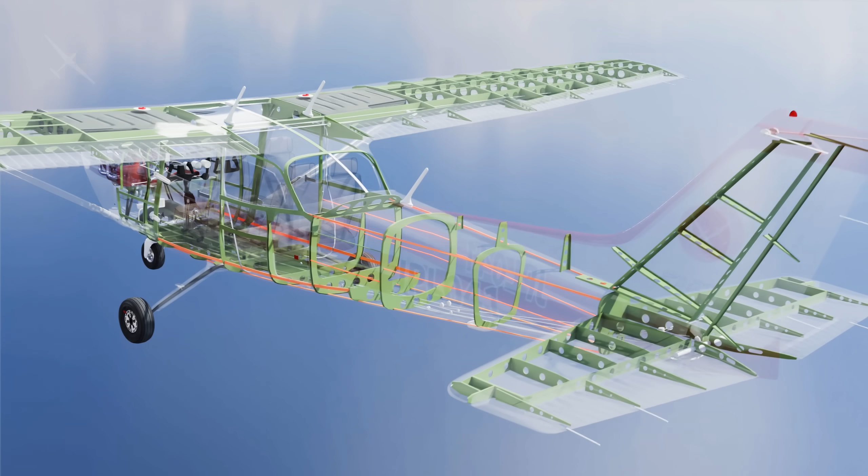The main landing gear requires to be made out of flexible steel to withstand the forces during hard landings.

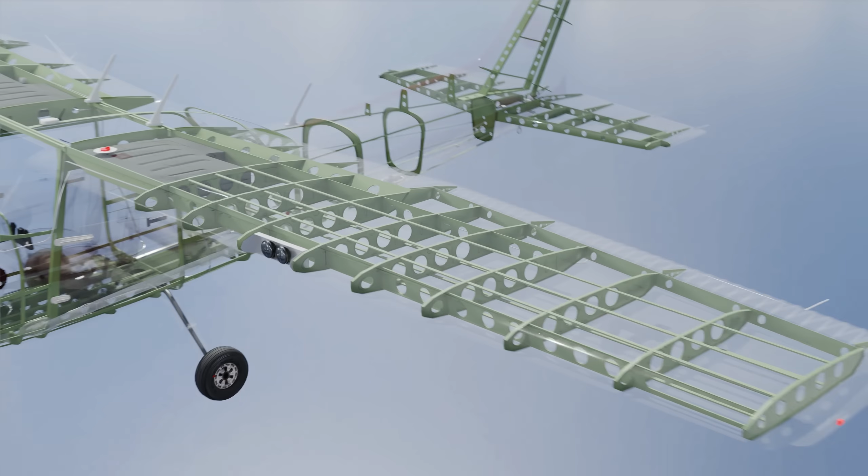If we look inside the wings, we'll find ribs, which provide the airfoil shape of the wing. Spars running through the entire length of the wings accomplish great strength, and stringers support the shape of the wing even more. The key point here is that the shape of the airfoil is very specific to preserve the flight characteristics of the aircraft and to produce lift efficiently and with the least aerodynamic drag possible.

The entire structure is covered with aluminum sheets riveted to the skeleton. This outer skin will further increase the strength of the airframe. This is called the airframe, which is considered to be the entire structure minus the engine and avionics.

The green color of the skeleton structure, sometimes yellow, comes from a primer layer of zinc chromate or zinc phosphate. It is applied to prevent corrosion on the aluminum surfaces in most parts. Older models might not have this layer of primer and will have the original aluminum metallic look.

This particular aircraft has wing struts to reinforce the joint between the wings and the fuselage. It attaches from the main spar to the lower front section of the fuselage.

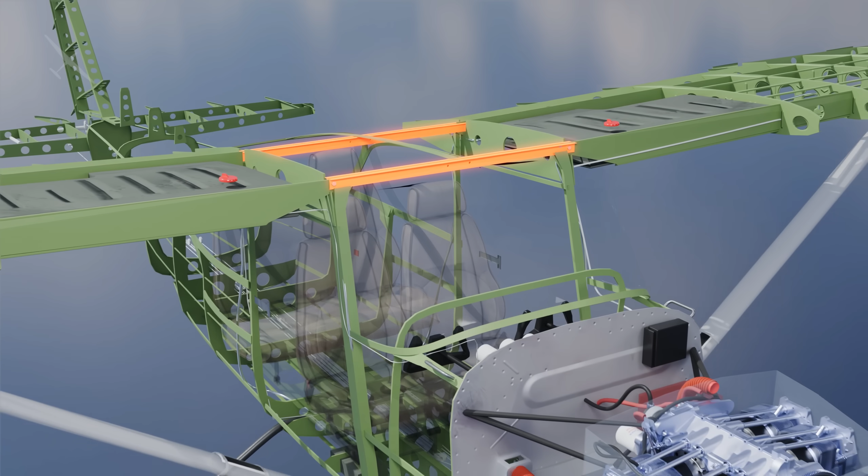Because this aircraft has a high wing configuration and headroom space in the cockpit is limited, the full main spars cannot go through the cockpit, and instead there are a couple of spar carry-through channels that join the two wings together. Of course, these channels are not as strong as the main spars, but that's when the wing struts come into play to distribute the load and forces.

On the exterior of the airframe, we'll see the static wicks or static dischargers attached to the sharpest points of the aircraft, like the trailing edge of the wings. They discharge accumulated static electricity back to the surrounding air while in flight. Without them, the static electricity builds up and accumulates on other sharp extremities, like the antennas, causing radio interference.

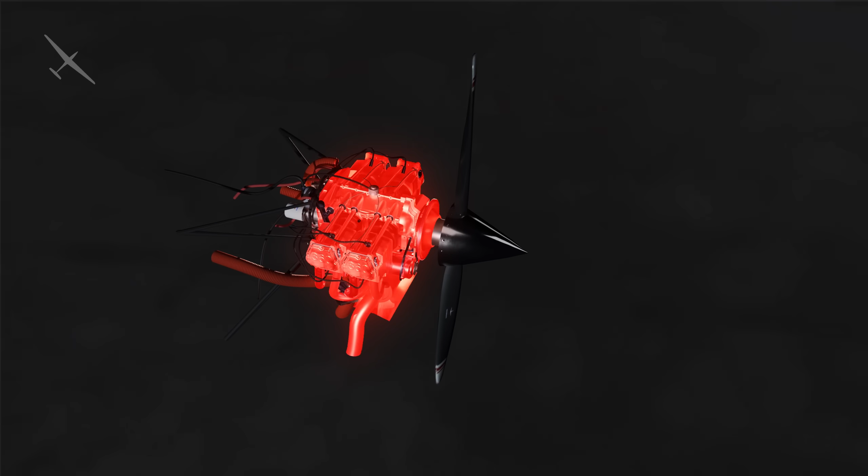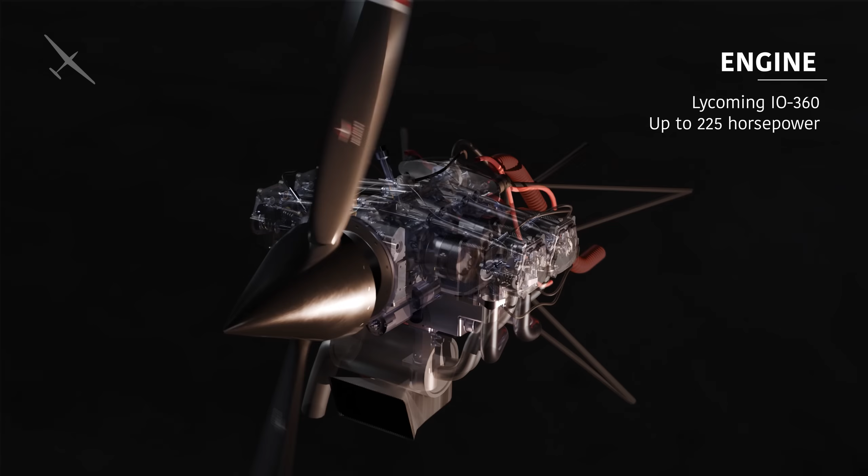Power plant. The power plant includes the engine, propeller, and other components. Different Cessna 172 models can use different types of engines, all of them very similar. In this model, we're looking at the Lycoming IO360, a 4-cylinder horizontally opposed piston engine that produces up to 225 horsepower.

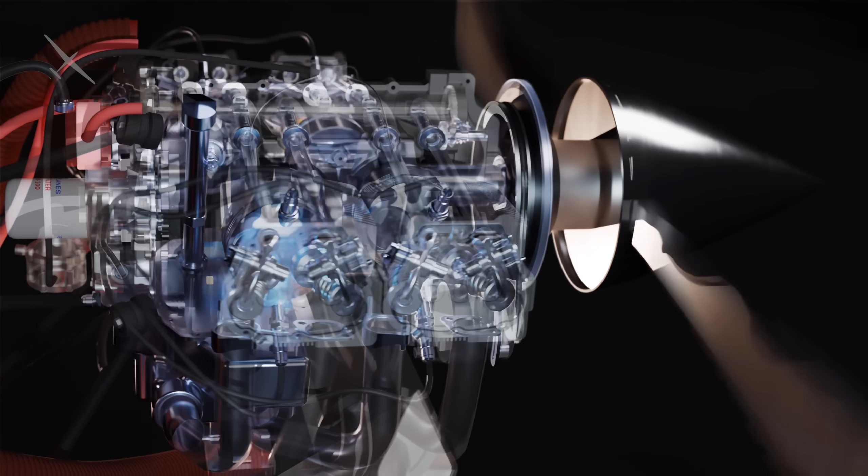The engine not only rotates the propeller to generate thrust, it also moves the alternator to produce electricity, a vacuum pump to maintain gyroscopic instruments working, and we can also use the heat produced by the engine to keep a comfortable temperature inside the cockpit.

This is also a 4-stroke engine, which means that each piston completes a cycle of intake, compression, combustion, and exhaust every 2 revolutions. At any given time, each of the cylinders in the engine is in a different stroke, meaning that there is always one cylinder in the combustion stroke, providing continuous power.

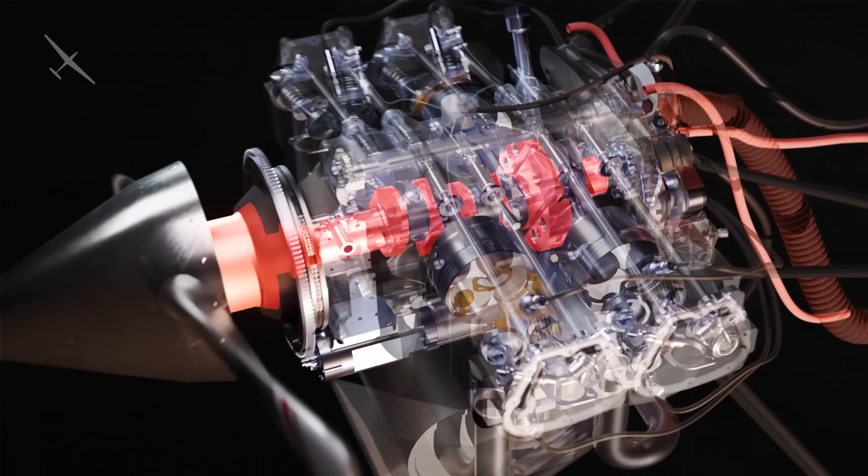The propeller is attached directly to the crankshaft, so that the power is directly transmitted from the engine to the propeller without any gear reduction. This is also known as direct drive.

The propeller in this case is a fixed-pitch propeller. It doesn't require as much maintenance and it's easy and cheap to replace.

Like in many aviation engines, this engine is cooled by air, taking air from the openings on the nose of the aircraft and redirecting it through the heat-dissipating structure of the cylinders, or fins.

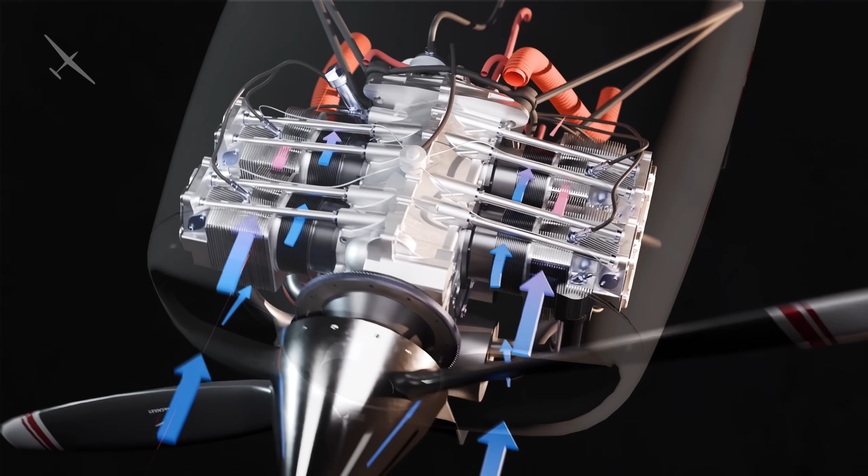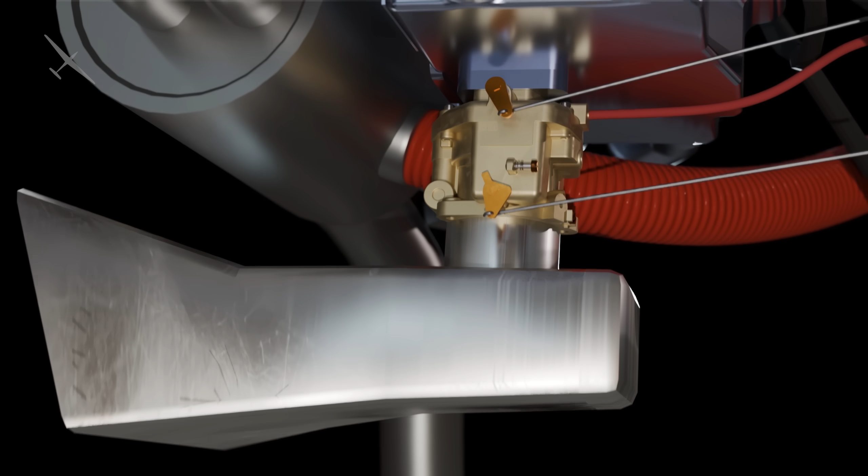Of course, the engine needs fuel to work, and there are 2 different systems to deliver the fuel to the engine: carburetor and fuel injection systems. The Lycoming IO360 uses fuel injection, which is a more modern system with advantages over carburetors. The carburetor, on the other hand, can still be used in piston engine aircraft, but it's an older system and relies more on mechanics than electronics. The goal of both systems is to provide a mix of air and fuel to the cylinders during the intake stroke.

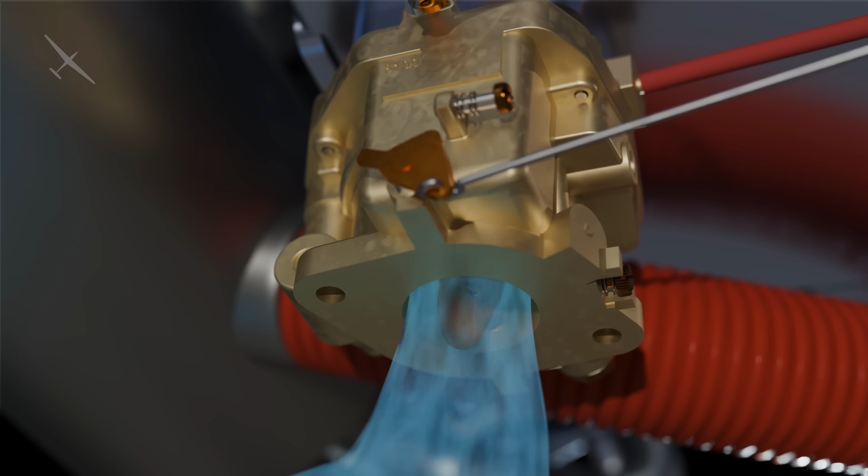The carburetor mixes the fuel and air before it enters the cylinder. The amount of fuel that enters the engine depends on the amount of air passing through it, thanks to the Venturi effect, which generates a lower pressure that sucks the fuel from the discharge nozzle.

The fuel injection system is more complicated but more efficient. It uses more components and relies on electronic sensors to function well. It also needs to maintain fuel pressure in the system. It constantly monitors the amount of air and throttle setting to calculate the precise amount of fuel that has to be injected at the correct time.

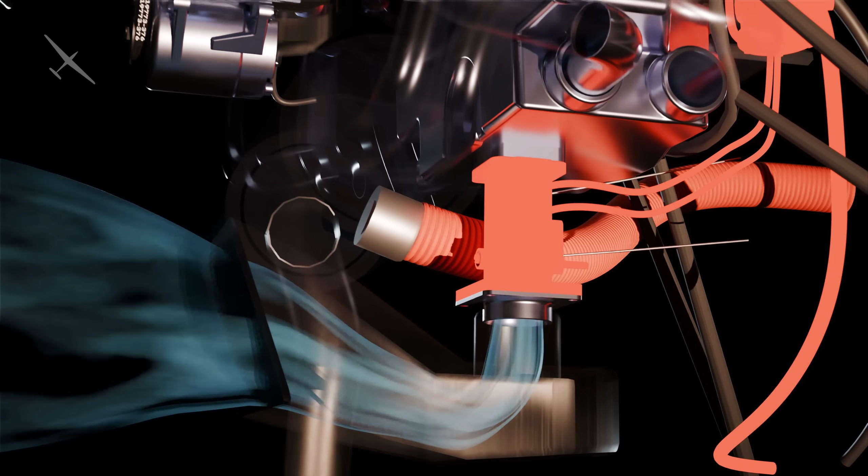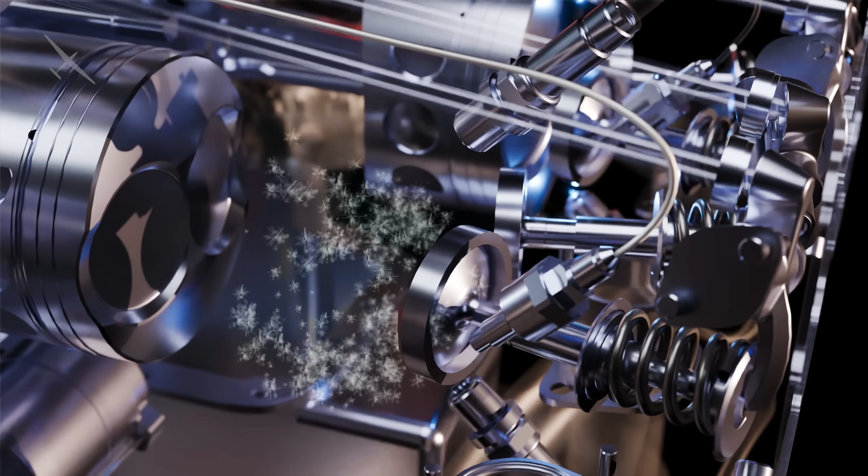The injectors are located at the cylinder heads, and the fuel is not mixed with air until it is injected into the cylinder. To ignite the fuel mixture, each cylinder has 2 spark plugs. It uses 2 for efficient combustion and also for redundancy.

The spark plugs generate a quick electric discharge powered by the magnetos. There are 2 magnetos, also for redundancy, and they rotate thanks to the engine. These magnetos are independent from the electric system of the airplane, so that in case of an electric failure, the engine can still run.

The engine is mounted on a metal frame with some elastomeric mounts to minimize vibrations. This assembly is attached to the main frame of the airplane.

Fuel system. The Cessna 172 has a fuel tank on each wing. Each tank can store up to 28 gallons, for a total of 56 gallons or 211 liters, but only 53 gallons or 200 liters are usable.

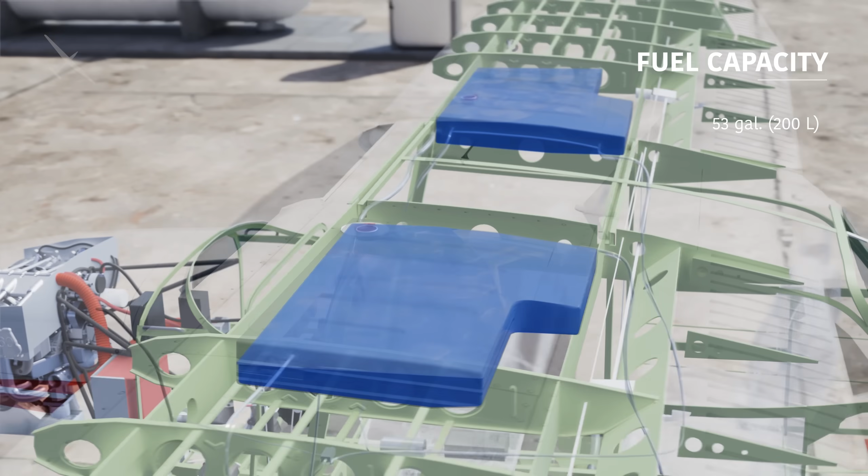The fuel used in this aircraft is the 100 low lead grade aviation, which is blue in color. 100 grade can also be used, in which case it's green.

To refuel the aircraft, first the operator must connect the grounding wire to the aircraft. The connection can be made at the exhaust or the tie-down ring under the wing, and then the available steps will help reach the top of the wings for refueling.

The fuel is distributed from the tanks through fuel lines that lead to a fuel selector switch in the cockpit. With this switch we can choose to draw the fuel from both tanks, the left tank, or the right tank. This can be used to balance the aircraft if there is one tank with more fuel than the other.

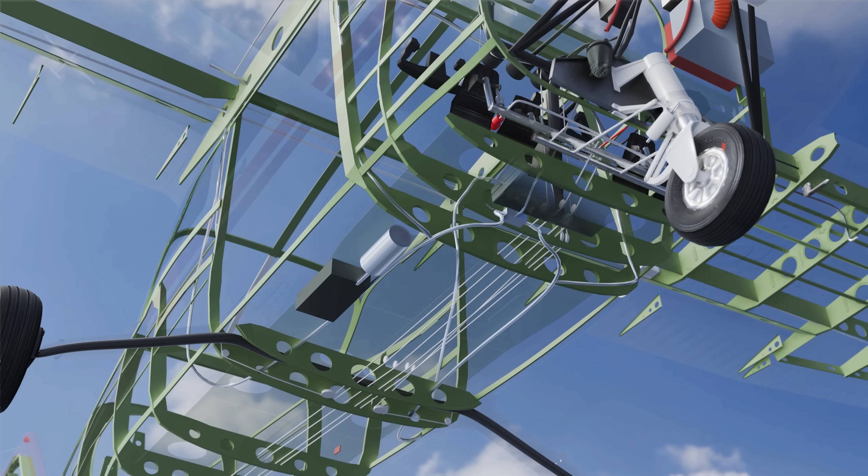There is a small fuel reservoir to catch the fuel from a return line from the engine. An electric auxiliary fuel pump is used to prime the engine during startup. Then the fuel goes through a filter called the gascolator, and finally an engine-driven fuel pump takes over during normal operation.

The fuel tanks have a small vent under the left wing, and it provides a pathway for the outside atmospheric pressure to stabilize with the pressure inside the tanks. During flight, the incoming air will create a positive pressure to facilitate the flow of fuel. Excess fuel can also drip from this vent.

Control surfaces. The control surfaces are used to maneuver the aircraft. The primary control surfaces found in all airplanes are the ailerons, the elevator, and the rudder. The secondary control surfaces are the flaps. Some aircraft will have more than one type of secondary control surface, but in most small airplanes, the flaps are enough. Let's go over the control surfaces in detail one by one.

The ailerons are on the wings. They control the roll of the airplane. When one aileron moves in one direction, the other moves in the opposite direction. This generates a difference of lift on the wings, more lift on one wing and a downforce on the other, rolling the aircraft to the desired direction.

The ailerons are controlled by wires connected to the main control hub, where the yokes are also connected, which, similar to a steering wheel of a car, will move the ailerons and in turn the airplane to the desired direction. This control moves the aircraft in the longitudinal axis.

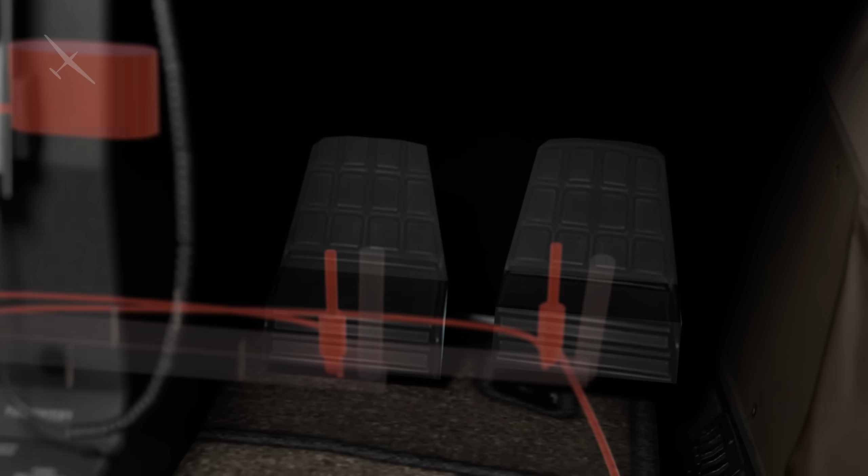The back wheels have brakes that can be actuated independently by using the pedals. This can help control the direction on the ground and of course slow down after landing. Notice how the motion for moving the rudder and braking is different.

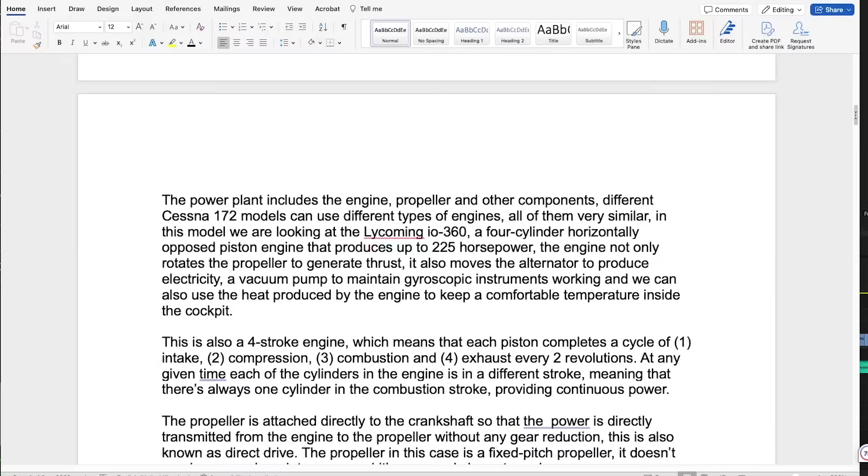Before continuing with the rest of the systems, I just wanted to mention how challenging the making of this video was. This video took a lot of research, animation, and logical thinking. I even learned some math and Python code for the creation of some animation drivers in Blender.

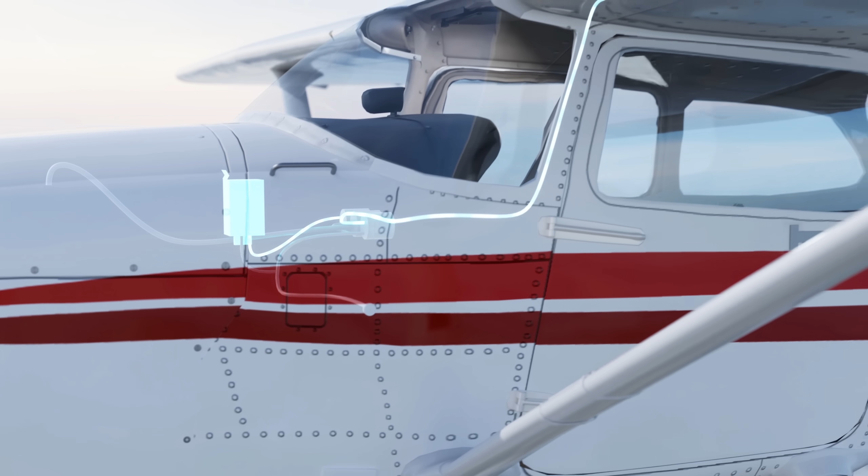The altimeter and vertical speed readings are taken from the static pressure port located on the left side of the fuselage. If this fails for some reason, like getting clogged, a switch can open a valve to read the pressure from the inside. Since the cockpit is not pressurized, the pressure will be almost identical to the outside.

The attitude indicator will show the bank and pitch angles of the aircraft in real time. The digital version shows it on the big screen and it uses an IMU, inertial measurement unit. But we still have the analog one for redundancy, and it uses a rotating gyroscope, which is rotated using the vacuum pump on the engine that will keep the instrument working. If vacuum pressure is lost, the instrument displays a red mark indicating no vacuum pressure.

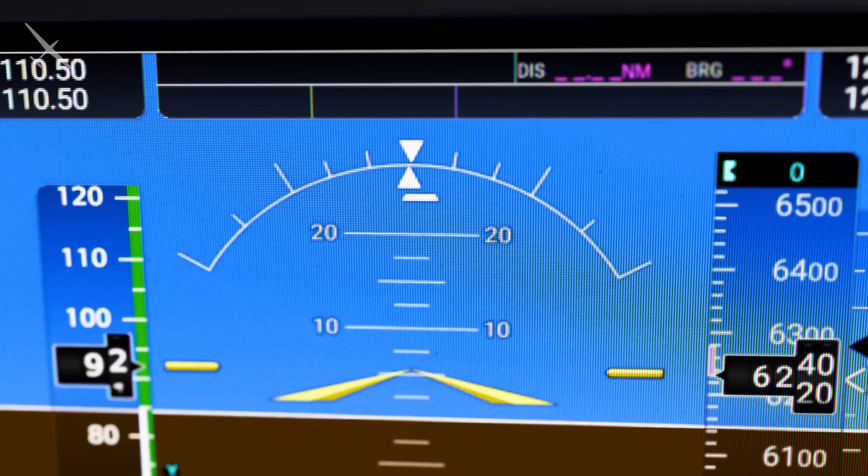At the top, it is common to find a redundancy analog compass. On the bottom left, we can find electric switches for lights, auxiliary fuel pump, avionics, and master electricity. At the bottom, we'll see the circuit breakers. Next to them is the ignition switch and magneto selector.

The airplane always operates in the 'both' position to use both magnetos.

In the center, we have the main throttle control of the engine, and next to it is the fuel mixture control. This makes the fuel mixture richer or leaner. Depending on the altitude or air pressure, the pilot will adjust the mixture control for more efficient combustion.

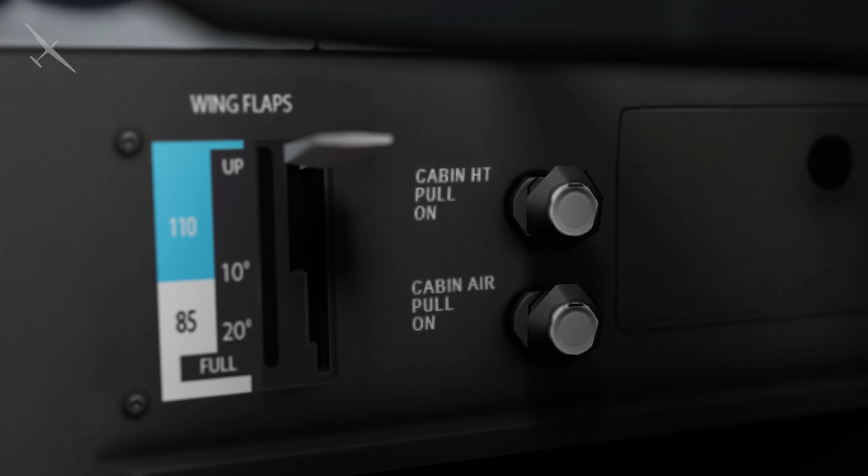The flap switch has the advised safe range of operational speed when the flaps are deployed. Here, it indicates that the plane must go at 110 knots or slower to deploy the flaps at 10 degrees, and at 85 knots or less to extend them from 20 to 30 degrees.

To the right, we can see two knobs to control the temperature and airflow inside the cabin. Down below, we see a fuel shut-off valve. In case of any fire, this valve should be pulled out. And again, we see the fuel selector switch and the elevator trim, which we have shown already.

Lights and electric system. As we saw in the panel, the lights can be switched on and off here. Other electric systems are also controlled from here. When the engine is not running, the battery is the main source of power. An external power unit can also be attached to the system.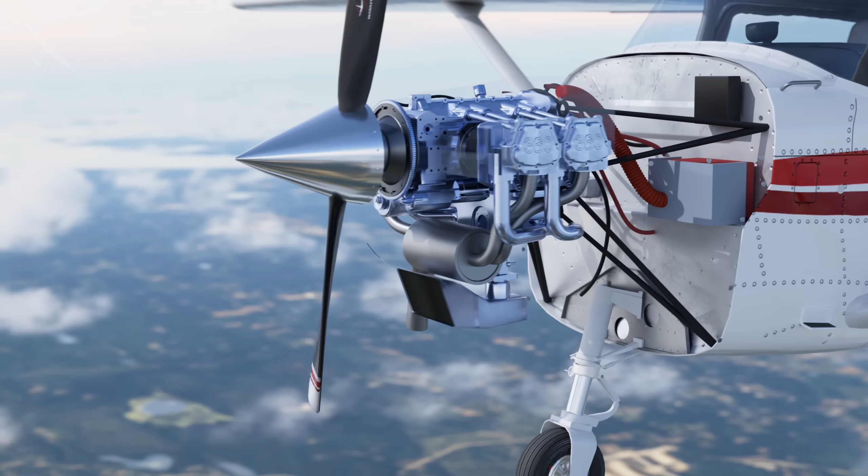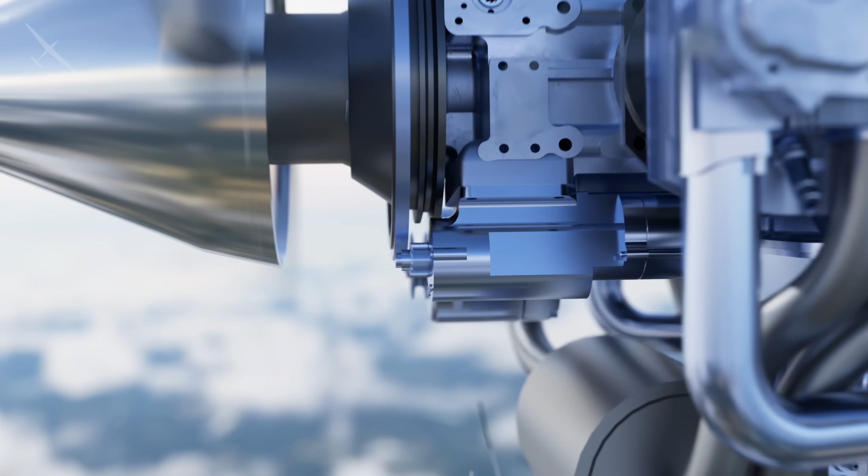To get the engine running, we'll first need to engage the starter. This device will start rotating the engine. It draws a massive amount of current from the battery. Such power is required to rotate the engine the first time. Once the engine starts to produce its own power from the combustion process, the starter will retract automatically. While the engine is running, the alternator will provide power to the aircraft and the battery will be recharged.

The aircraft's visibility is paramount, especially during the night. That's why this aircraft is equipped with different lights. The beacon light can be found at the top of the vertical stabilizer. It's a red flashing light and it's turned on to alert the ground crew that the engine is about to start, and it can be switched off when the engine has stopped.

The strobe lights, also known as anti-collision lights, are white flashing lights that improve the visibility of the aircraft during the night. They warn other pilots in the air of the presence of another aircraft. They can be located at the wingtips and, in some models, also at the back.

The navigation lights, also known as position lights, are steady lights that show the position and direction of the aircraft. On the left wingtip there is a red light, on the right wingtip there is a green light, and at the back there is a white light. In different versions of the Cessna 172, this setup can be achieved in different ways, but the law requires all aircraft to meet certain standards.

The landing and taxi lights in this model are located in the leading edge of the left wing. They're used to illuminate in front of the aircraft during takeoff and landing, and during taxi on the ground.

Although I've tried to cover as much as possible about the Cessna 172 in this video, there are many more details I haven't mentioned. Much of what I've learned about this amazing airplane is thanks to Pilot Institute and its lead instructor Greg. With their free deep dive classes and free courses, you can start learning aviation right away.